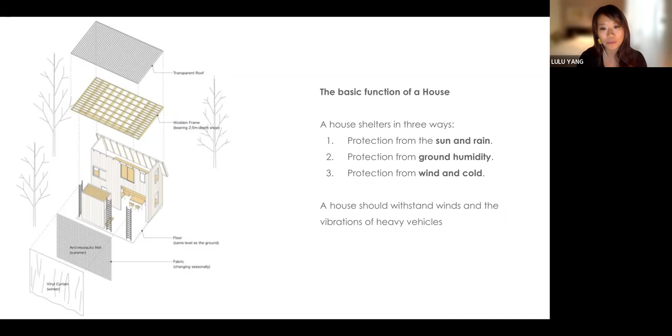So I will begin with the presentation, and today is basically a high-level discussion on how to design energy-efficient houses. So to begin with, I want to discuss what is actually housing. There are 3 basic functions of a house. A house is practically a shelter that protects from sun and rain, protects from ground humidity, and also protects from wind and cold. And then there are 3 fundamental elements that compose a house, which are walls, roof, as well as floor. And obviously where those components meet are the weak points, which we will discuss later in this session.

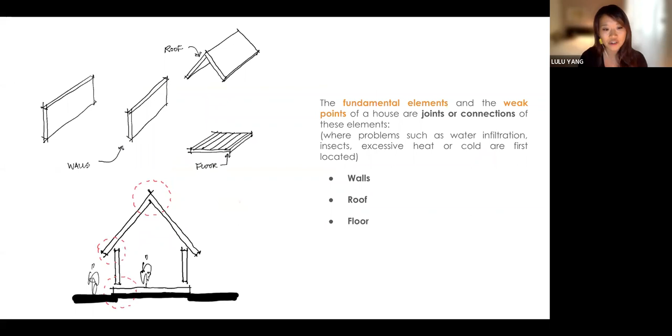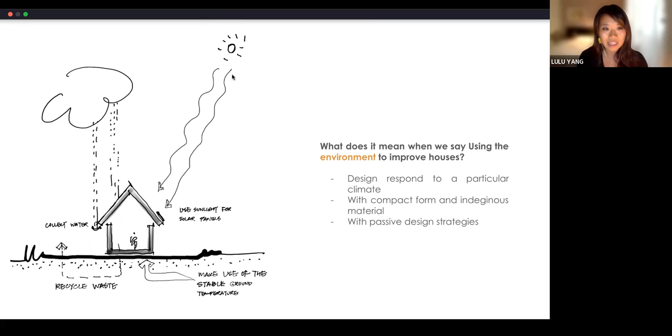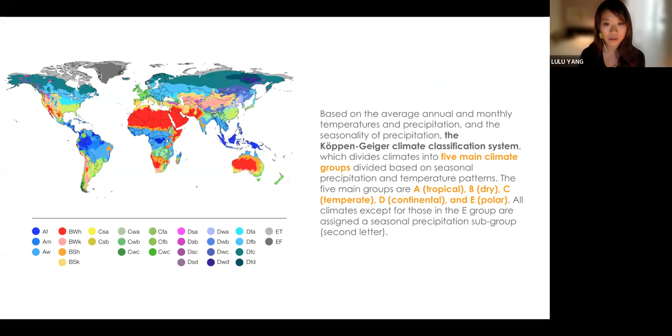So the second thing I want to touch on is very important in the background, which is climate. Why do we want to discuss climate? Well, it is very important to know as an architect, as a designer, as a builder, where exactly you are placing your house. Based on the classification system globally, there are 5 main climate groups: A tropical, B dry, C temperate, D continental, and E polar. Lesotho, for example, is dominated by monsoon-influenced temperate oceanic climate, as well as a small component of monsoon-influenced humid subtropical climate.

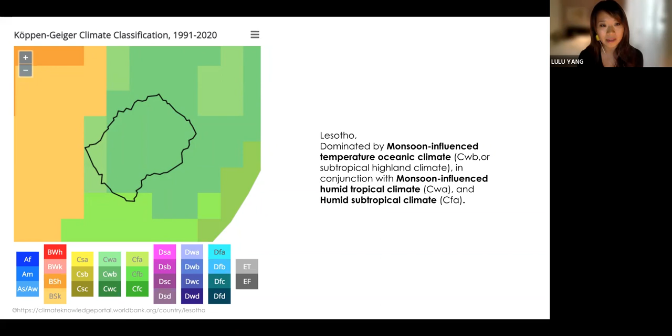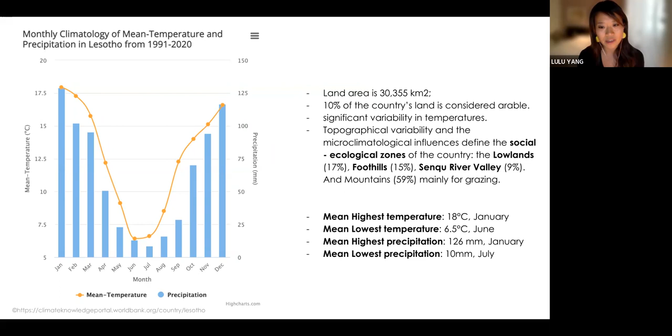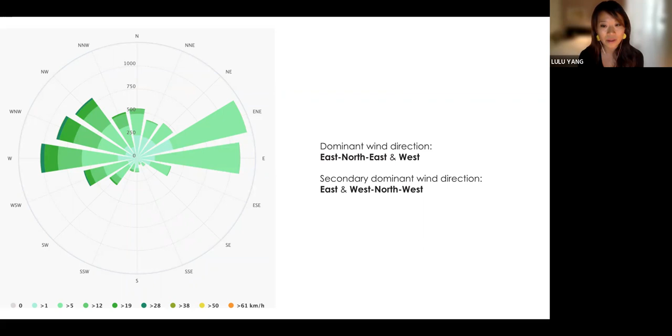Another important factor about the climate is wind. Where does the wind come from? In the case of Lesotho, the dominant wind direction is east-northeast as well as the west. And the secondary dominant wind directions are east and west-northwest. So there are some important sources for climate information, and it's important to gather more information and achieve an average understanding of what is actually accurate data in its location.

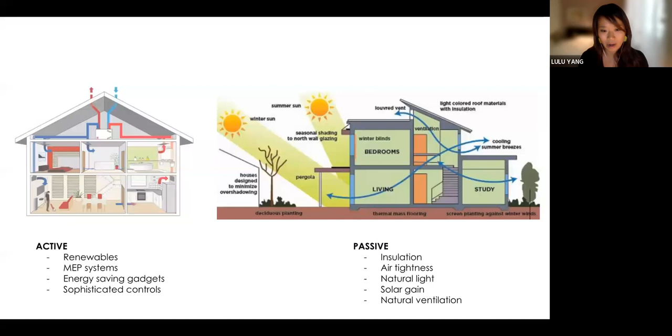So for that, let's begin to talk about the principles in passive housing design. In general, there are 7, and we will go through each one of them later. The first is orientation.

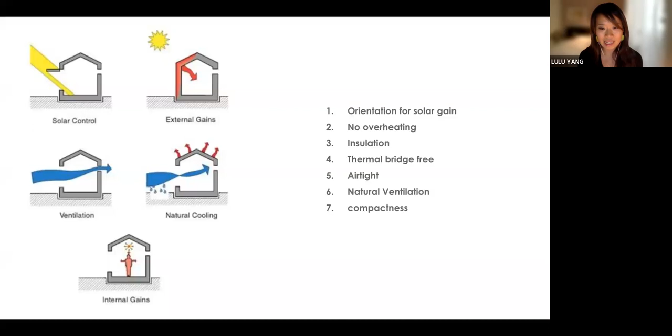The same way that it's important to know where the house is located in the world, it's also very important to understand where the house faces on the specific site, to understand where the sun comes from. For example, in the Northern Hemisphere, the sun generally comes from the south, so it's important to face the long facade towards the south, in order to best utilize the summer sun as well as the winter sun. Obviously the case is reversed in the Southern Hemisphere.

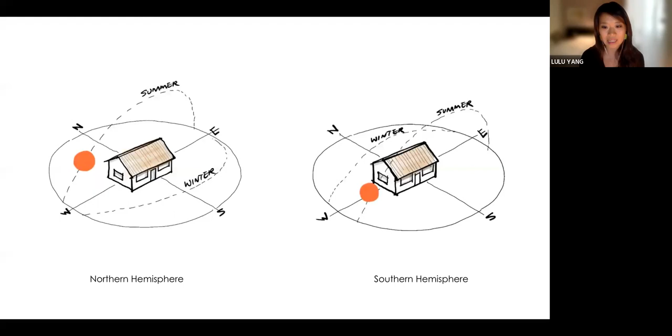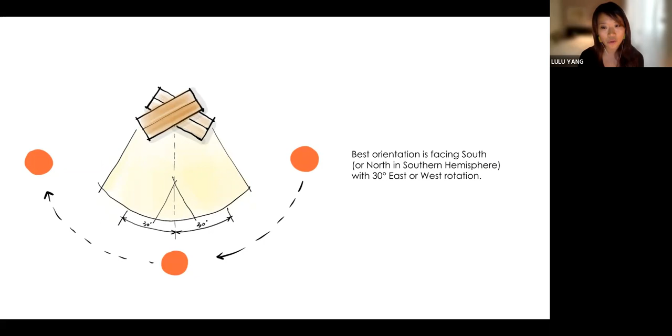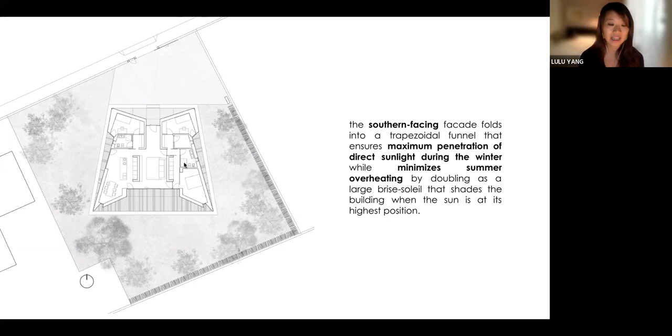As mentioned before, in the Northern Hemisphere, the best orientation is facing south with 30 degrees east or west rotation. One case study that best represents this is a private house in Northern Italy. If we take a look at the plan, it's facing directly towards the south with a large glazing panel on the south facade, with a living room area towards the south to maximize the penetration of direct sunlight during winter and also minimize summer overheating by the tapering of the roof. Also on the east and west facade, you can see strategic cuts of the openings in order to maximize solar penetration.

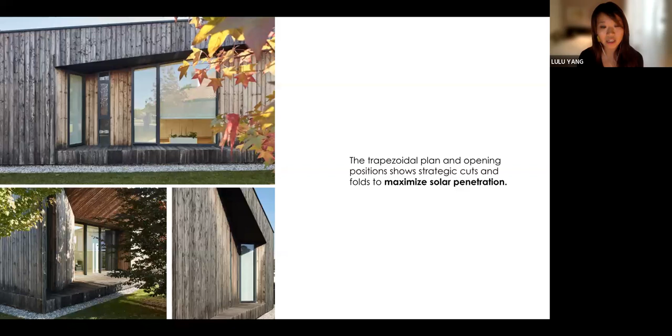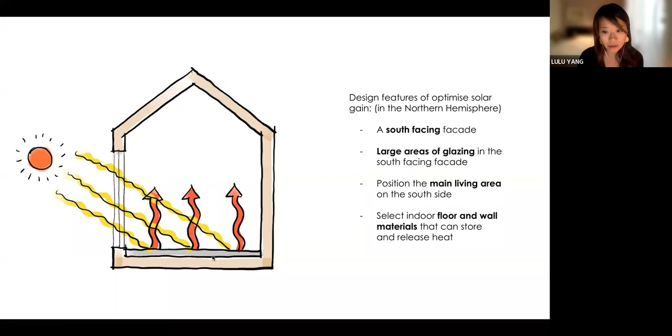The second strategy is solar gain. In the same vein, for example, in the Northern Hemisphere, we need to have a south-facing facade with a large area of glazing, position main living areas on the south side, and select indoor floor and wall materials that can store and release heat later on.

Back to the same example, we can see that on the south facade, there is a large glazing with living areas that really maximize the solar gain within the room.

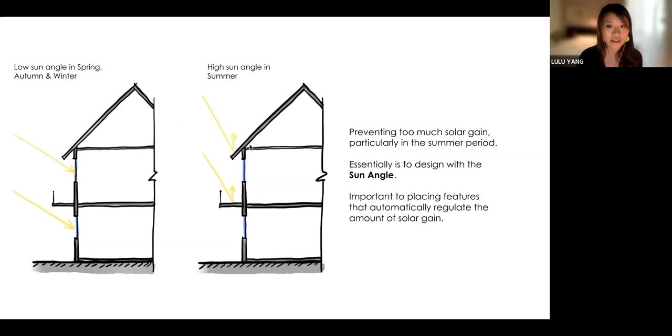Strategy number 3 is no overheating. This strategy is essentially to design with the sun angle - understanding how the low sun angle happens in spring, autumn, and winter, and the high sun angle happens in the summer, to prevent too much solar gain, particularly in the summer period.

In this diagram, we can see three main features to achieve the same result: a balcony, a roof overhang, and a shading panel that prevents the summer sun from entering the house and exceeding the desired solar gain, because that would add pressure for cooling. It's important to note that building physical features are much more effective in achieving this control rather than just using blinds or curtains, because they don't involve any human intervention to turn on and off.

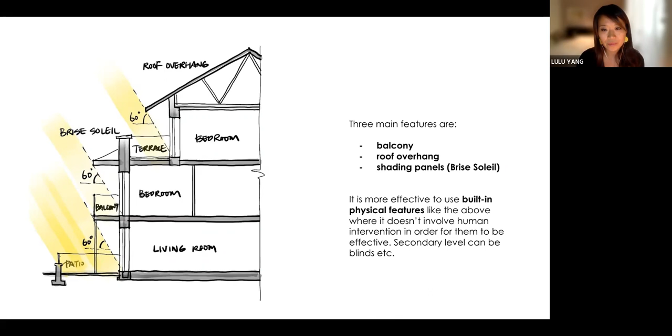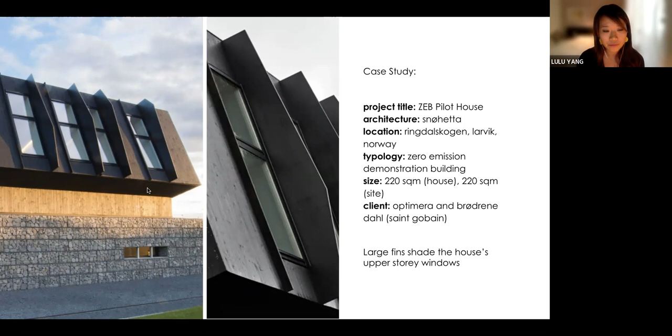In this case study by Snøhetta, a private house in Norway, they placed large fins to shade the house on the upper story windows. Back to the previous example of the house in Italy, the roof tapers in to create an angle that prevents a high sun angle from entering the house in the summer.

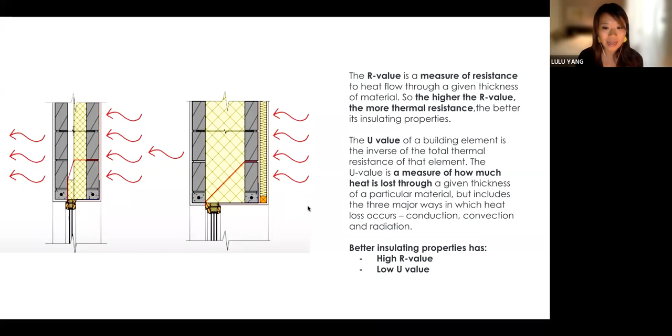Principle number 4 is insulation. This may get a little technical, but it's not really difficult - we have to touch on two basic values: the R value and the U value. The R value is a measure of material resistance, so the higher the R value, the more thermally resistant it is. The U value is essentially the reverse of the R value, and it measures how much heat is lost through a given thickness of a particular material. So in summary, better insulation property means a high R value and a low U value.

In this graph, there's a comparison between the German legally prescribed standard for new construction and the passive housing standard. You can see that the envelope thickness is significantly thicker in the passive housing standard, and the values here indicate the U value. As mentioned before, the lower U value means better insulation properties, so with the increased thickness, the insulation property increases in passive housing.

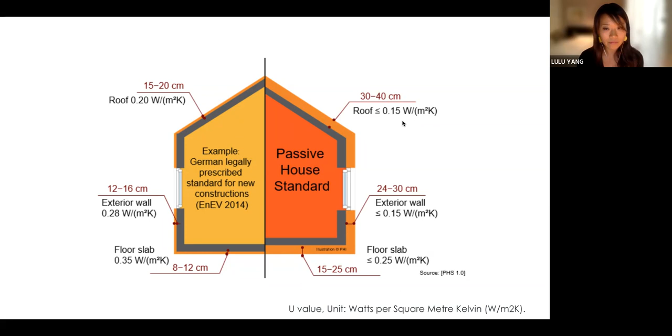The wall buildup. There are many off-the-shelf products that provide sufficient insulation properties. However, in the passive design strategies, what I want to stress is that there are many indigenous materials that use thermal mass to achieve quite reputable insulation performance, such as rammed earth, stone, building wood, etc.

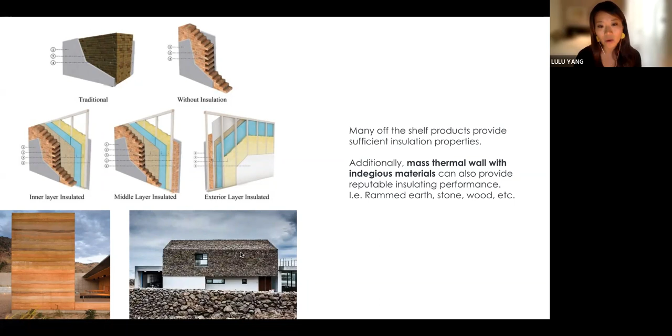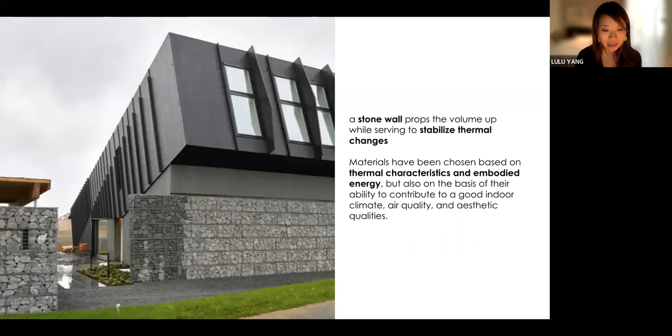This is one example we showed before, the private house in Norway. You can see on the north side they placed a large stone wall that stabilizes thermal changes. This selection of material not only utilizes thermal characteristics and embodied energy, but also contributes to good indoor climate, air quality, and aesthetic qualities. The same way, on the east and north facade exterior wall in this small courtyard, they used wood logs that achieve the same sort of thermal result.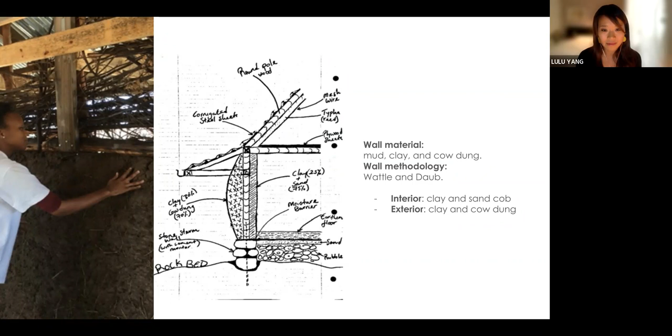His walls, for example, are combined with only three materials using the methodology of wattle and daub. On the interior layer is a combination of clay and sand cob. On the exterior layer is clay and cow dung. For the roof, insulation material is a local thatch called Typha, which has zero cost and really, really good insulation properties. The framing is local tree and timber over a stone stem wall.

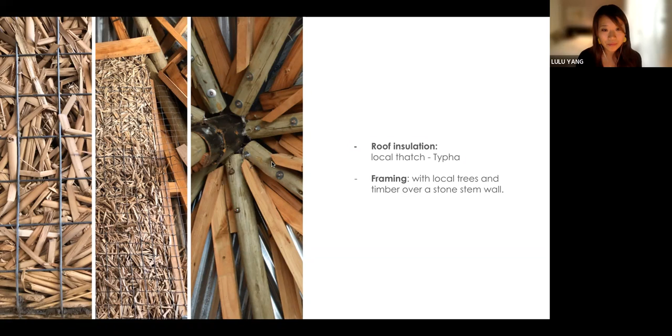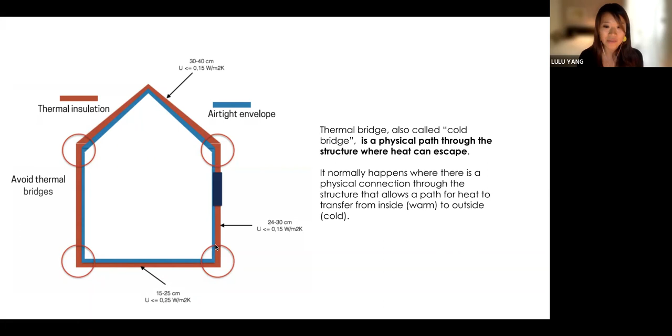Principle number 5 is thermal bridge free. A thermal bridge, also called cold bridge, is a physical path through the structure where heat can escape. Normally it happens where there's a physical connection through the structure that allows a path for heat transfer from the warm inside to the cold outside.

How do you prevent it? Essentially you break it. For example, in the picture on the left, there is a concrete floor that continues from inside to the outside balcony, but heat is lost through the concrete slab from the indoor hot environment to the outdoor cold environment. Whereas if you simply break this connection with different material and construction method, you would easily prevent the thermal bridge effect.

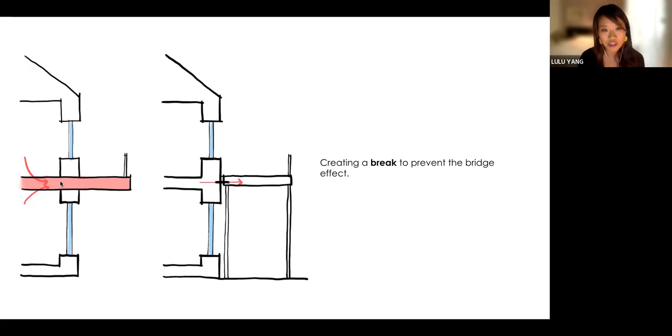Principle number 6 is airtight and ventilation. As we mentioned before, an airtight envelope acts as a physical barrier to prevent air movement in order to minimize heat loss. But in the meantime, it's also very important to create openings to allow fresh air to go in, so we have to strategically place windows that allow a passive ventilation system to function.

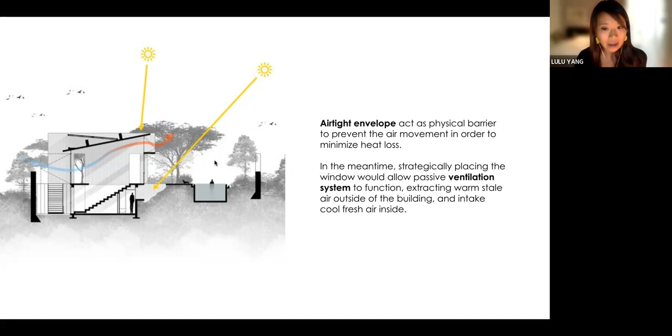Warm air is lighter than cold air. So placing openings at a proper location would extract warm stale air outside the building and intake cool fresh air to the inside.

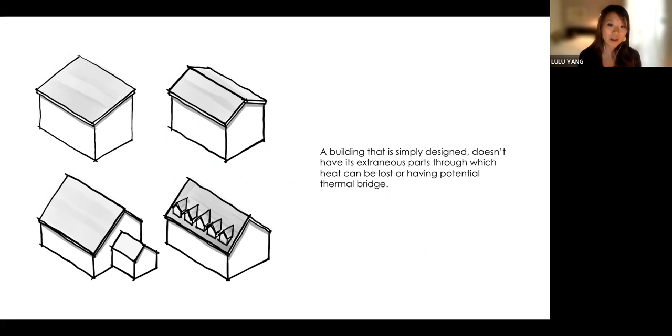The last component is compactness. A building that is simply designed doesn't have extraneous parts through which heat can be lost or which could create potential thermal bridges. We can take many examples from indigenous typologies, such as the Basotho hut, which is a very compact, simple form, and obviously Pax's house is inspired by this form. Also the example we showed before from a private house in Italy uses a compact form.

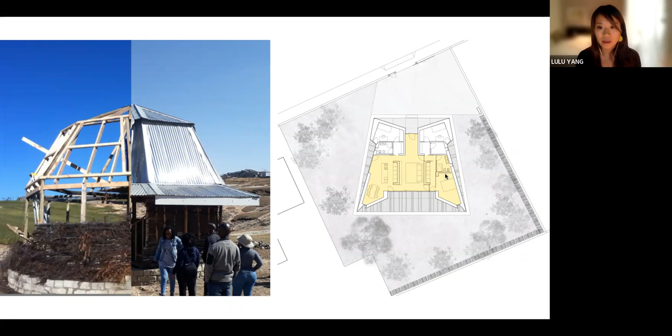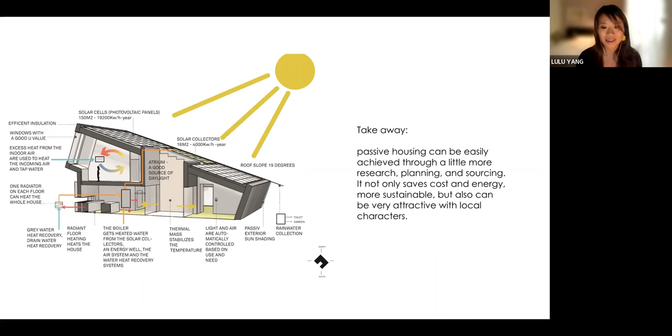So to conclude, what are the takeaways of the passive housing strategies? It's really not that difficult to achieve, because what you have to do is a little bit more research, planning, and sourcing for materials. As a result, it would not only save cost and energy and be more sustainable, but can also be very attractive with many local characteristics. So with that, I conclude my presentation and welcome any questions if you have. Thank you.